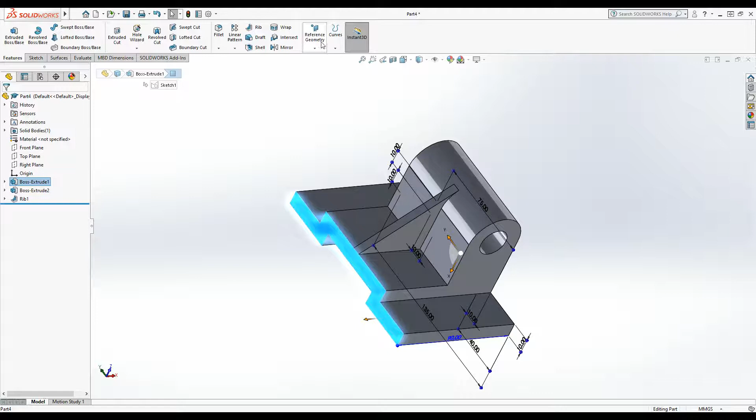Alright, picking up from where the last video finished, I was just about to do the small ribs on the side of the model. So we need to create an offset plane here. I'm going to work from the center of those ribs, so it's 40 mm away from this surface here. So I'm just going to go into reference geometry, choose plane, create an offset of 40, and over here I get the option to flip the offset. Again, Solidworks doesn't like minus numbers, so you'll often find a reverse or a flip option.

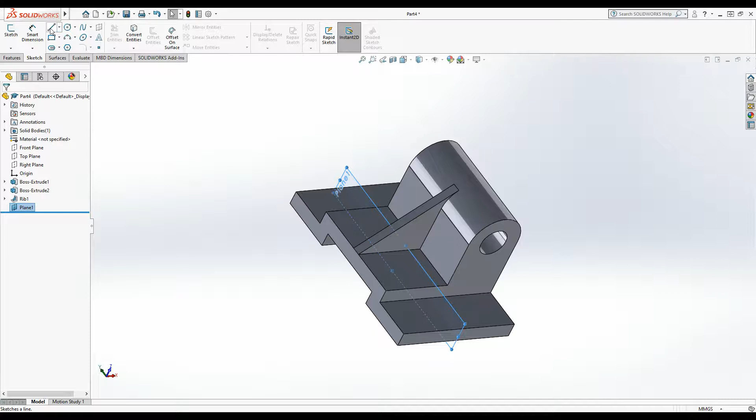Okay, green tick, and we need to just draw a line onto this plane. Unfortunately, each rib has to be done separately. The rib tool doesn't like creating them at the same time. But once we've got one, we can also use the mirror function to copy that over to the other side. So into the sketch tools, get the line tool, spacebar, normal to. Let's snap to the two corners where the rib's going to be, so here and here. Exit the sketch.

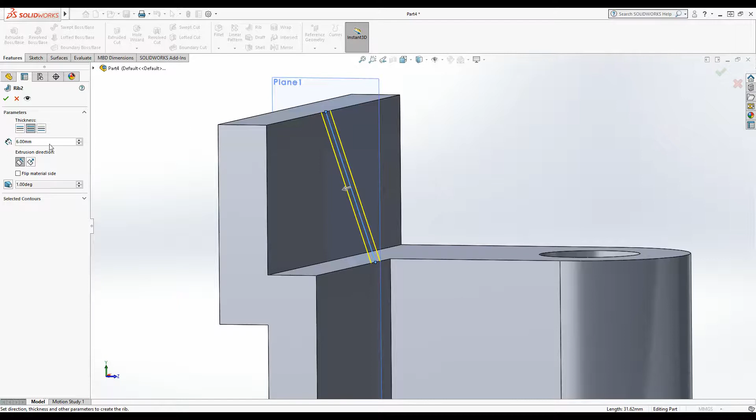Go into the Features tab, get the rib tool, click on the line. Make sure the arrows point in the body. The width for the rib is 6 and it's symmetrical. Okay, green tick.

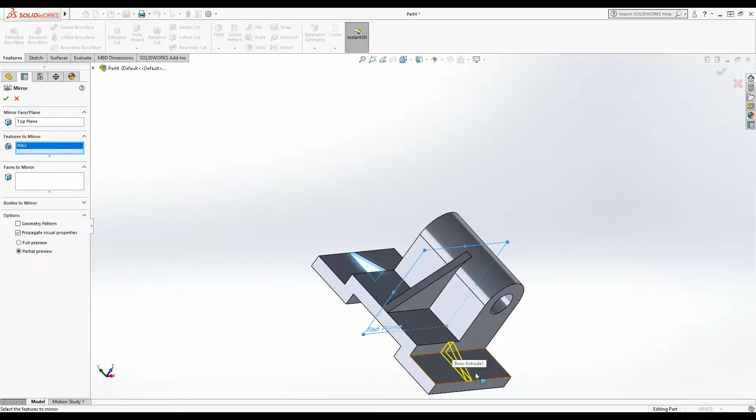Okay, now hopefully we've already got a plane in place that we can use to mirror this over. So I'm just going to hide this plane. Okay, let's have a look. So this plane here sits down the center of the model. So this is my top plane. I'm going to go into the mirror tool from the Features tab and see it's put the top plane in here. Now I'm going to use the Features option. Click on the rib I want to copy over, and straight away you can see the copy on the other side of the model. Green tick to complete.

Okay, so just some holes now. I'm going to select the surface I want to cut away from and go into the extruded cut tool. Spacebar, normal to, and get the circle tool from the sketch tools. And I'm just going to randomly position the circle in here for now. Get the smart dimension tool and start adding some measurements. So from the center of the circle to the top edge we want 15 mm, and from the center of the circle to the left edge we want 20 mm.

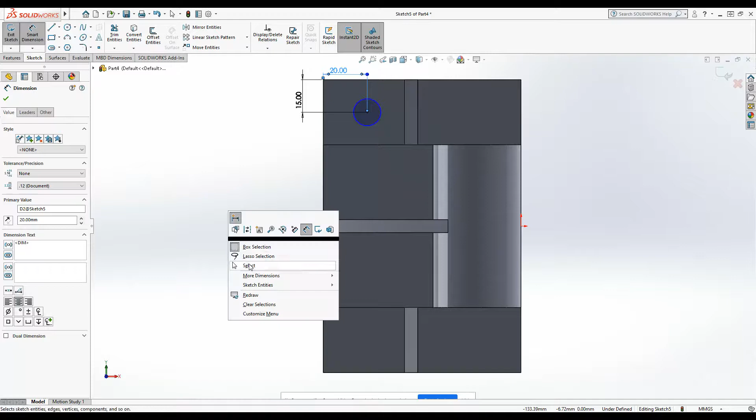Okay. Now we could draw these all out separately, nothing wrong with that. However, there is a slightly quicker option. So I'm going to select the circle and go into the linear sketch pattern option here. Okay, we do want 2 circles in the X direction, and we also need 2 circles in the Y direction. So coming down the side here, you can see just increase the entities. Alright, now it goes positive, so we need to just switch the direction over using this arrow.

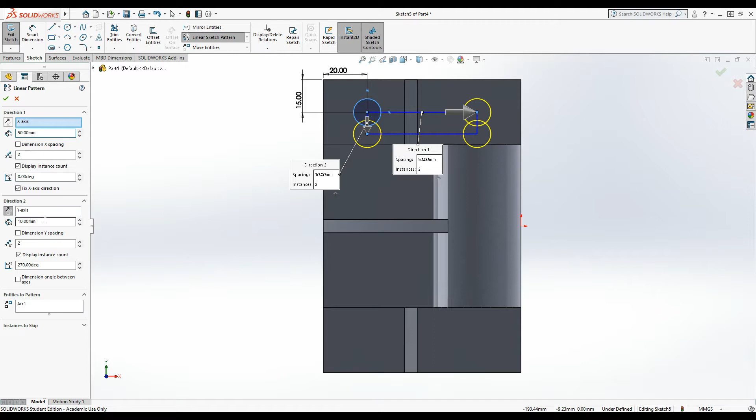Okay, the distance across the X-axis is 50, and the distance in the Y-axis is 10. And that positions all the circles for us, so we just green tick. We can exit the sketch. And where it says blind, we just change it to through all, so we don't need to worry about the dimensions, and green tick. And that completes the bracket model.